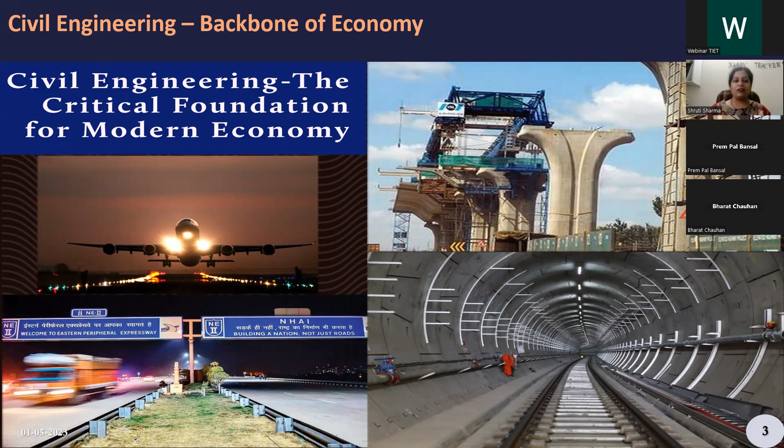Of an economy, as rightly said by Mr. Bharat Chauhan, it is the critical foundation for a modern economy. You can see the pictures in the slide here, the expressways, the NHAI, the tunnels, and the flyovers. They are the foundation for today's economy.

I must say, civil engineers are never out of demand. This profession, these civil engineers, they're always in demand. Why do I say that? You know, the global infrastructure, the huge population and the geographical areas still need to be covered with infrastructure, including India. We are way short of the need of a global infrastructure. We are still falling short of it.

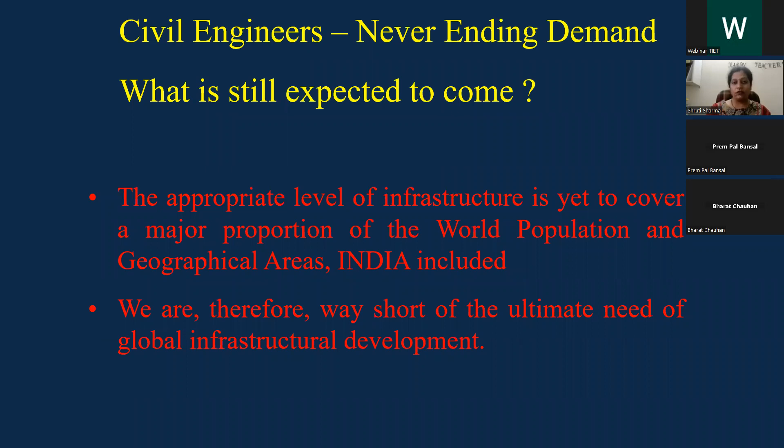I'll show you the slides. What's the role of a civil engineer? Why do we need it? When I say a developing country like India, the entire focus of a developing nation is on infrastructure development. Now the focus has shifted towards developing smarter cities, implementation of green environment, using or replacing non-renewable energy sources with renewable energy sources, and making our country energy efficient.

So there is never a scenario where a civil engineer will go out of scope, as the role of civil engineers in a developing nation will always be there. There will in fact be more demand in a developing country rather than in a developed nation.

Now we are seeing the growth of the population, urbanization is skyrocketing. So there is always going to be a shortage of projects or infrastructure needs. We need new roads, we need to renew old ones, we need more railway projects like metros, we need more airports. For that we need structural engineers, a specific side of a civil engineer, geotechnical engineers meaning soil engineers, or highway engineers. We need environmental engineers, again civil engineers with specific studies on environmental assessment or energy efficiency.

Another branch can be water resource management. We know that we need water lines, implementation of water management schemes, water management plants in the city. So again, the role of a civil engineer.

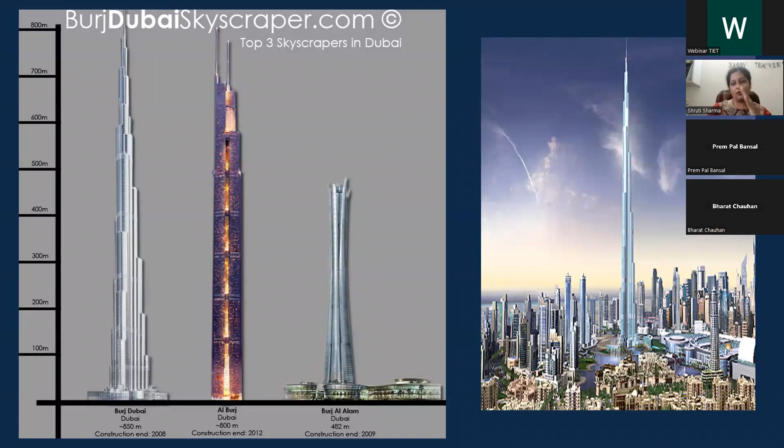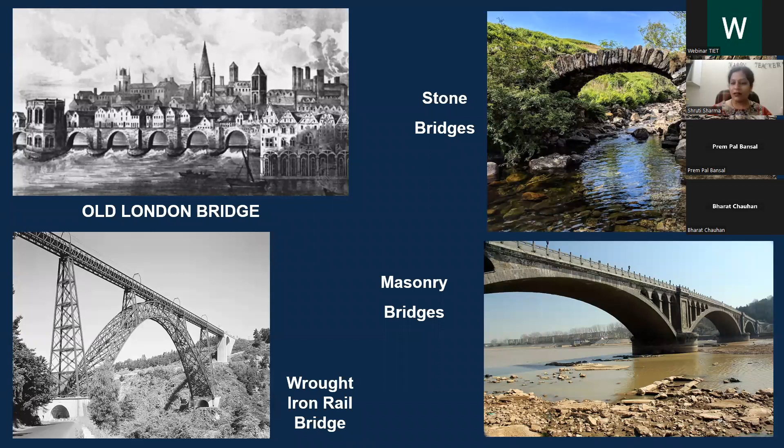Infrastructure building has come a long way. We started from the same old London Bridge, the London Bridge is falling down rhyme which we have heard in nursery rhymes. It has been there for centuries, it has developed over a period. We had stone bridges, wrought iron bridges, masonry bridges, and now what we have are the structures you see on this slide, the best structures in the world in a way. Just see the beauty, the aesthetics, and the technical development in these structures.

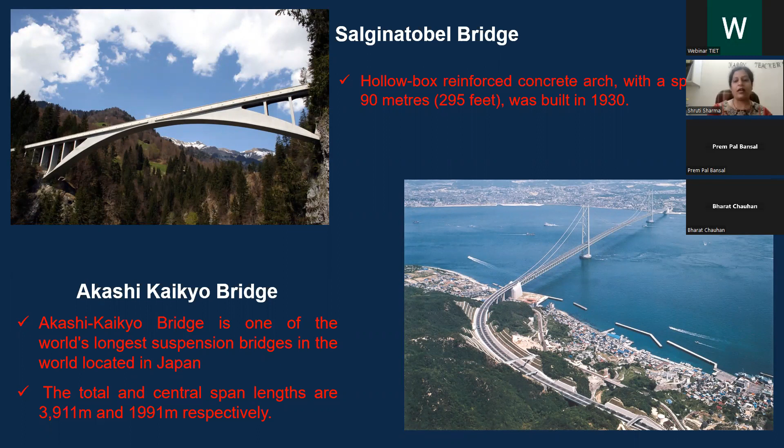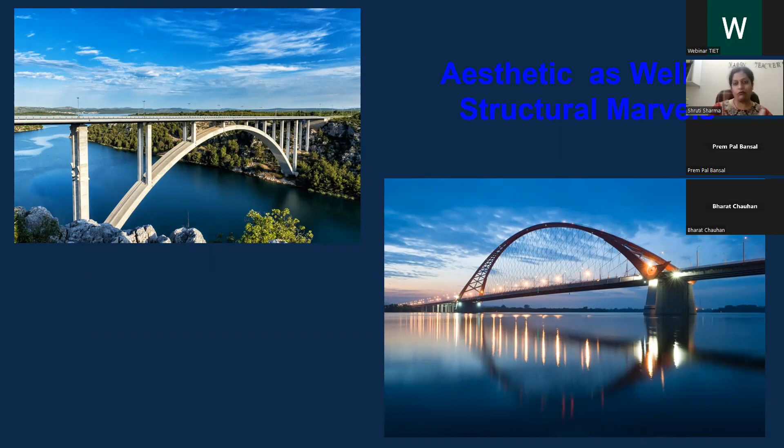The Akashi Kaikyo Bridge is one of the longest suspension bridges in the world, located in Japan. All of these are engineering marvels designed by civil engineers. You can never deny the role of a civil engineer. Look at the aesthetics and the structural marvels you are seeing now. They are buildings which have come into form and shape, and they are the pillars of the economy of various countries, including ours, which I'll show you.

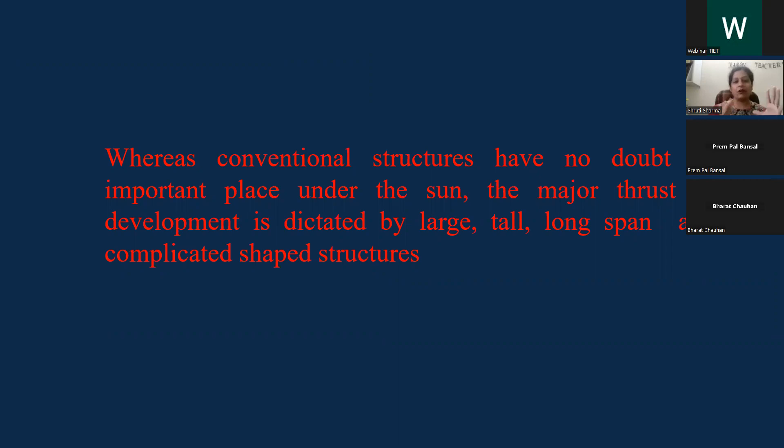Yes, the conventional structures, the houses we see around, are conventional structures. They are important, affordable housing is important, but when I say development, when I say infrastructural development and the role of a civil engineer, it is dictated by these tall, long skyscrapers, long span structures, and complicated shapes. Any shape you think of, now they are all coming up in this way.

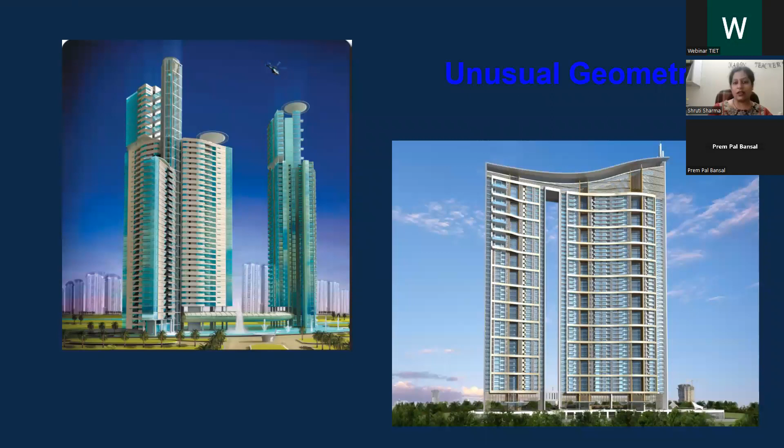We have seen so many of these skyscrapers in Noida, Gurgaon - let's not even talk of outside countries. They're all complicated shapes, and it's not so easy. It is the role of a civil engineer. You know, civil engineering is a royal branch in a way - you create something, you get that feeling that I'm a part of this creation. So it's not easy, it's tedious. These complicated shapes and tedious designs are all the role of a civil engineer, and look at the aesthetics they add to the country, and the economy they establish.

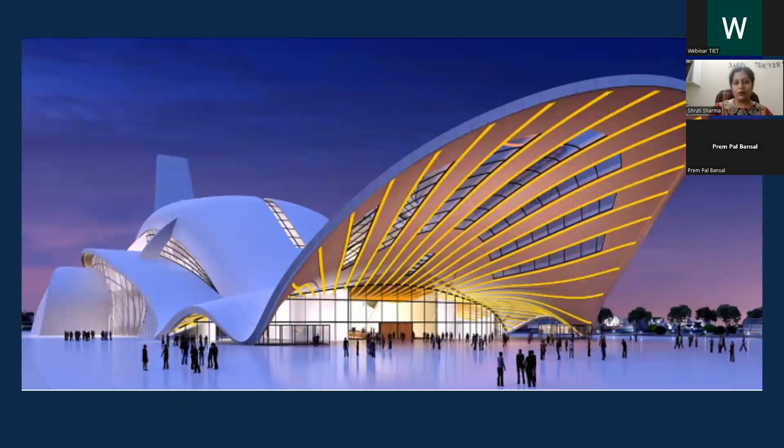These beautiful structures - now see, this is a South Indian pandal, just a political rally pandal. But imagine this whole large span structure being supported by these minute tubular members. They are the trusses, all designed by civil engineers.

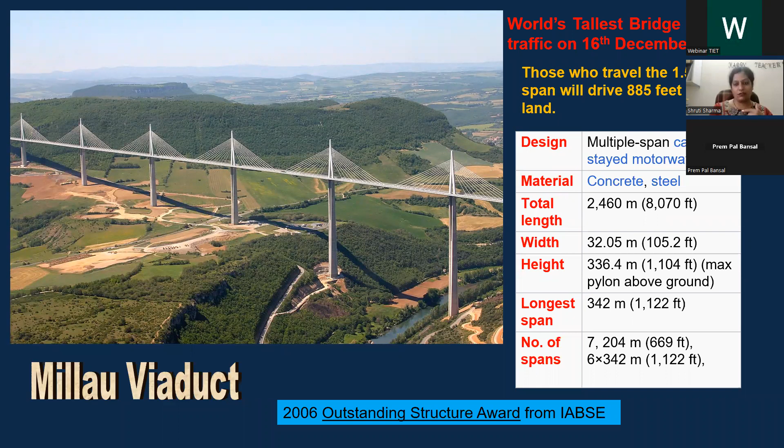Civil engineering is the backbone - we must have heard of the Millau Viaduct. It's a 7-span structure, a motorway bridge, a cable stayed bridge. When you travel on this span of 1.5 miles, you're actually traveling 885 feet above the ground. It's an engineering marvel. It has been awarded the best or outstanding structure award by the International Association for Bridge and Structure. So these are some things which are real and created by civil engineers.

India - it's not that we are showing these beautiful pictures and they're not a part of it. They are very much. Let us see what India is making. India is making world-class infrastructure. To list a few, it's a very menial list I've come up with.

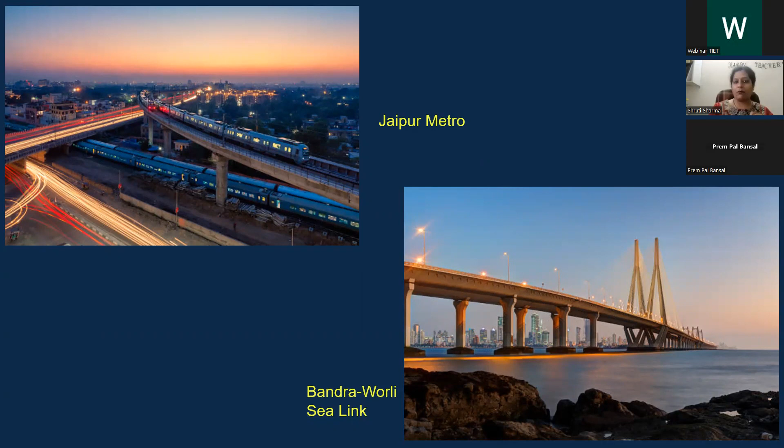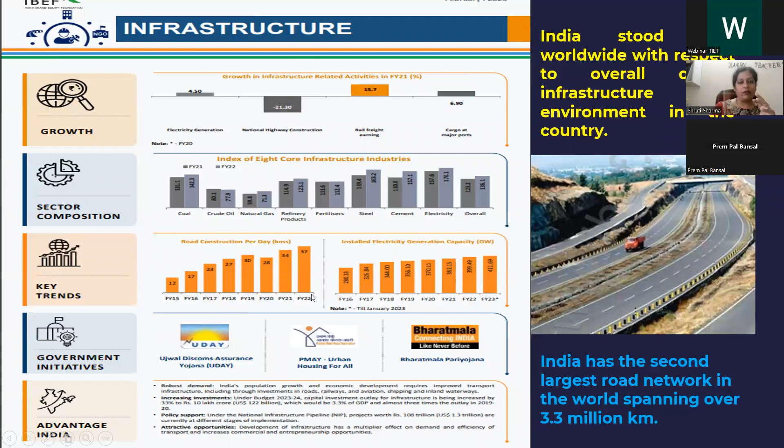The index for the 8 core infrastructure industries, out of the steel and cement, they are just expanding. The key trend - if you see the road construction per day in terms of kilometers, in every financial year right from 2015 to 22, it is skyrocketing. So this is the vision of the government, and we have to play a key role in it.

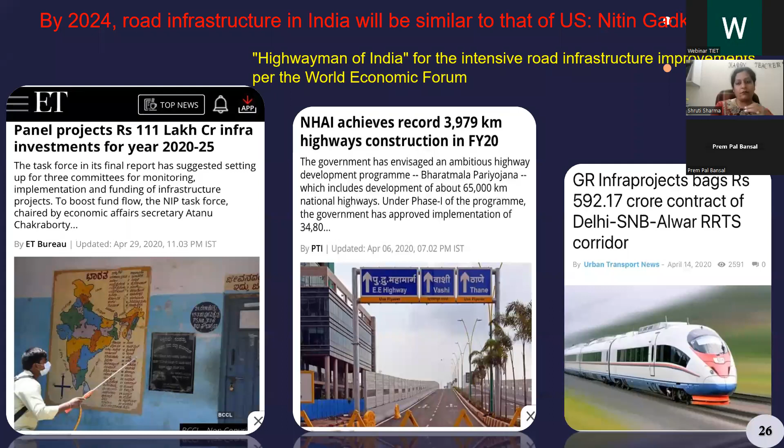...by the World Economic Forum. Why? He has been instrumental in shaping the kind of infrastructure development which has taken place in this country in the last 10 years. He says that the road infrastructure by 2024-25 will be similar to that in the US. And the government, as you see in the slide, is pumping in huge amounts of funds, and projects are being given or started or initiated or going on.

Just to add, the Thapar Institute has been appointed by the National Highway Authority of India in some mega infrastructure projects in one form or the other, like 4-laning of the roads in Himachal Pradesh. This is NH21. They have a team in Thapar Institute. I'll be outlining the team leaders here. They are safety consultants for the 4-laning of the Jammu Udhampur section, NH-1A.

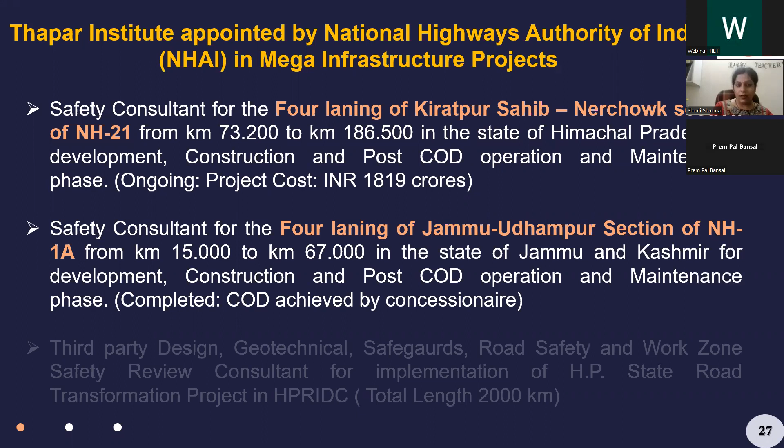Many, so many of them. They are also leading consultants in many major infrastructure projects in India, mainly construction of bridges, 4-laning projects, safety audits, and other things related to highways.

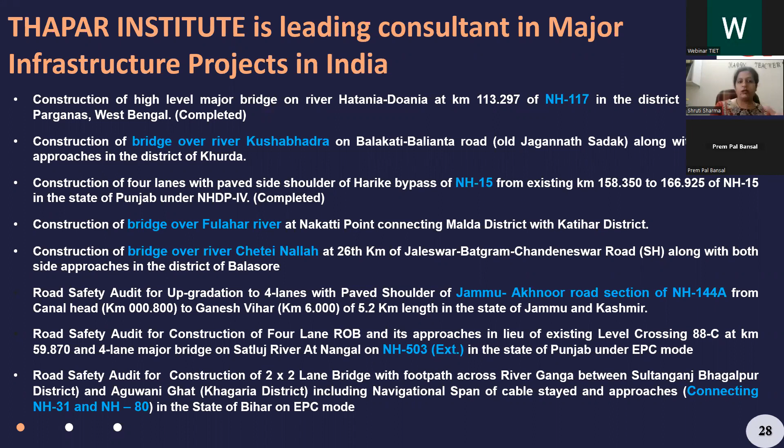So this is our team. The project team is headed by Dr. Naveen Kwatra. He's a professor in the department, and Dr. Prem Pal Bansal, who is the head of the department, and a road safety auditor, co-assisted by Dr. Tanu Chopra, whose specialization is transportation engineering, and Mr. Rajesh Pathak, who has specialization in geotechnical engineering.

So this is what I said: the role of everybody, structural engineers, transportation engineers. This faculty team, this project team at Thapar Institute, is supporting that dream.

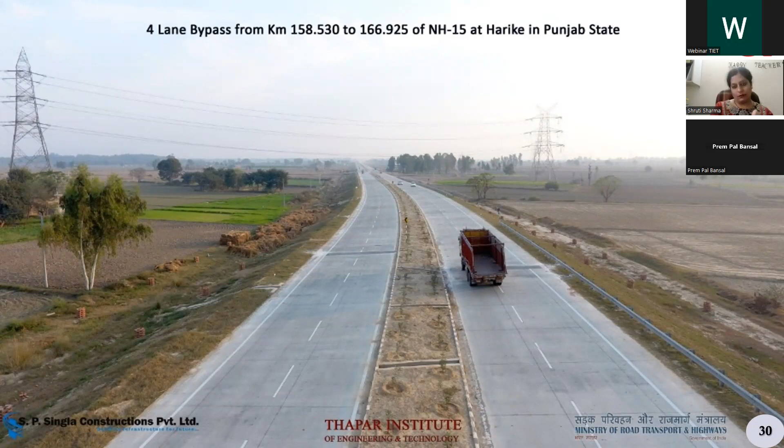Some of the clips from projects the department has worked on, like the 4-laning of Harike in Punjab state, then construction, just a small 2 or 3 slides. So it's following the vision here. It's not only about the rail roads and highways.

It's also about the government's dedication towards developing or revolutionizing the Indian railways. So there comes again the role of civil engineering, east-west corridors, called the dedicated freight corridors. So the government is pumping in more investment. We need good civil engineers. The government needs us, the country needs us.

Similarly, airports. India has become the 3rd largest aviation market, and it will become even larger by 2025. According to the GDP, to achieve a GDP of 4 or 5 trillion by 2025, India needs to spend about 1.4 trillion on infrastructure, and one of the major sectors is airports.

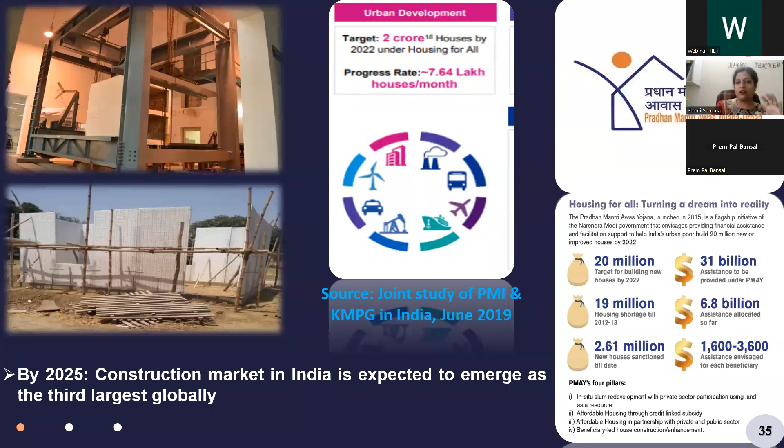Likewise, Pradhan Mantri Awas Yojana, housing for all, is something big. The dreams of the common man have now been turned into reality. By 2025, the construction market in India is expected to emerge as the 3rd largest. This is one aspect.

Then smart cities. It is the engine of the Indian economy. The government is dedicated towards developing 100 smart cities. This is what it will look like, the futuristic smart city concept. This is the technology, just one small glimpse of how our cities are going to look. And we definitely have a role to play. Let me tell you how.

This BE Civil Engineering scheme at Thapar University, Thapar Institute, in alignment with the vision of the government of India towards sustainable development, smart cities, and infrastructure development, gives you an engineering degree with focus areas. You can choose a specialization in smart cities, infrastructure development, structural engineering, or sustainability. So this is how we align.

So we have changed our curriculum, our pedagogy, our scheme, as well as the teaching methods, as laid down by Dr. Batish. We have modified all of that, entirely in line with what...

We are really short. The market predicts a supply gap of 44 million civil engineering professionals in India. This was 2020, when there was no COVID. Now that gap has become all the more wide. India will need 50,000... there is a need.

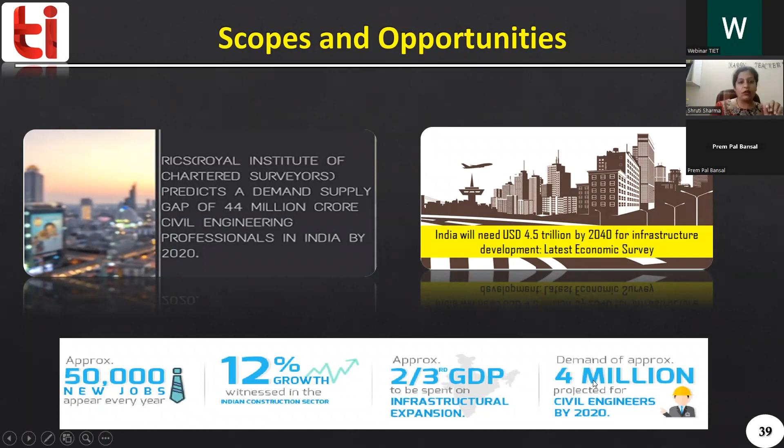Approximately 2/3 of the GDP is being spent on infrastructure development. We definitely need 4 million projected engineers in civil engineering. This is not 2020, this is now 2025, whatever I'm saying.

So the Department of Civil Engineering at Thapar Institute, if I take you on a tour of this, has aligned itself according to the vision of the government. The vision is that we need to develop our human resources. Here, the human resource development is the engineers you are making. They should have excellence in technical education, research, and career opportunities.

If somebody asks me what will I do when I become a BE civil engineer, it's as simple as that. As I said, all the infrastructure which I've been seeing in the previous slides is all made by engineers. It's the culmination, the joint effort of an architect, an engineer, and a skilled worker or laborer who make these structures.

So you can start a job as a fresher in the industry, in the real estate sector. You can work in PSUs, you can have government engineering jobs. There is another area or regime - if you have an acumen for research, you can join as a scientist. You can start your own entrepreneurial venture in India.

And there are some students who may have an inclination for higher studies. You can do a masters in civil engineering in European countries, US, Canada. You can have higher education in India itself. The new thing now is MBA, in specific regimes like infrastructure development, management, construction management, project management, real estate management.

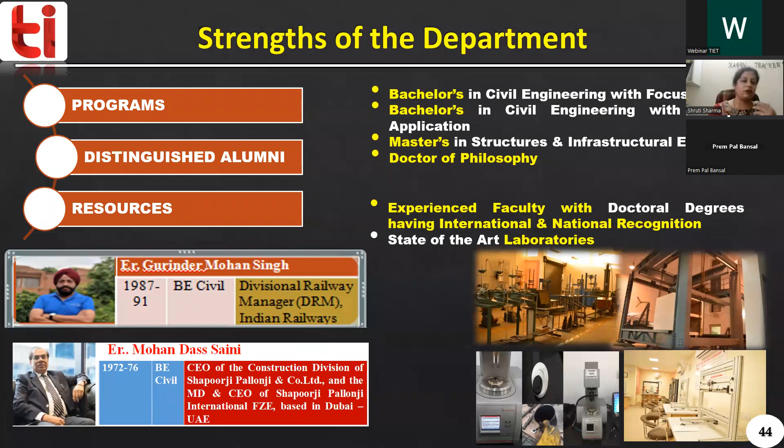Strengths - the third, and most important, are the resources of the department. It's not only about the infrastructure, the state-of-art laboratories. It's about the faculty here, which we are proud of - we have such a strong, experienced faculty having their degrees from various national and internationally recognized universities. We are really proud of it.

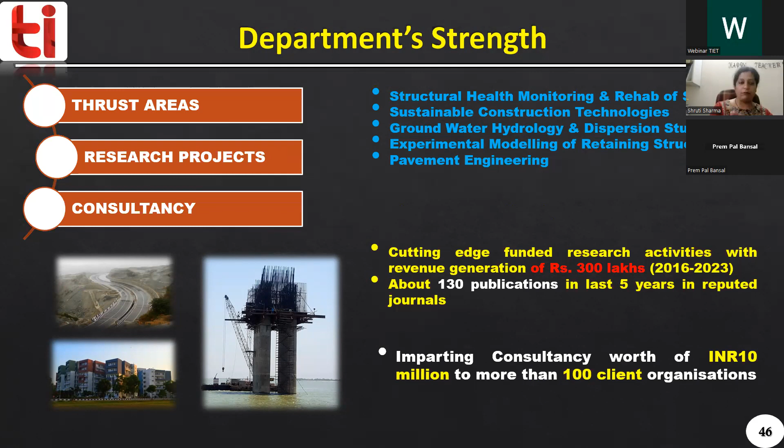And the faculty here is not only involved in teaching, they are into research, contributing to research which can lead to some other innovative technologies being developed. They are involved in research activities and have been able to generate revenue of about 300 lakhs in the past 6-7 years, with more than 130 publications - this is only Scopus index publications. We also have a very strong hold, as I showed in a few slides, on how the faculty here is involved in consultancy work and working in tandem with government projects.

Highlights - so the highlights of the BE Civil Engineering program, as I said, will have one being the BE Civil Engineering degree with specializations, all these specific focused areas. Then BE Civil Engineering with computer applications, which I just outlined.

In addition, I wanted to add that the students will be taught civil engineering courses with focus towards software - STAAD, AutoCAD, many more, Revit, then GIS-based systems, all the software which we have. They will also be taught some 5 or 6 courses which are specifically computer oriented, like networks and so on.

So there's another thing - in every engineering stream in this university, the student can enter into any stream, including civil engineering, and get a civil engineering degree at the end of 4 years, BE Civil Engineering. In addition, a minor in computers, for which he has to do 5 to 6 courses along with his regular scheme during this 4-year duration, totally focused on computer applications or computer subjects.

So this is an overview of the programs which we are offering here. The best highlight, as said by Dr. Batish, is that we don't believe in rote learning or the traditional method of teaching. Our students are exposed to experiential learning projects, meaning hands-on experience by their own hands.

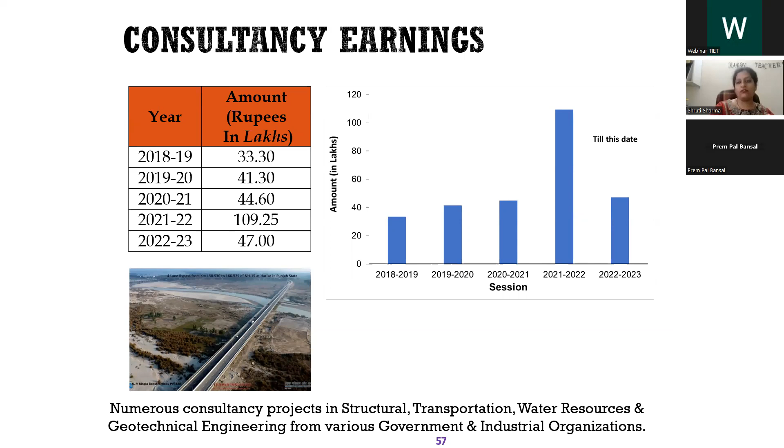Till only March 2023, we have these figures. I think this pillar will still go up further. And since our faculty is involved in structural, transportation, water resources, and many other consultancy projects, this is the figure of the consultancy earnings which our department has got.

The recognitions: Dr. Prem Pal Bansal, who is heading the department, received the ICI award for the best research paper on construction techniques. Dr. Shweta Goyal has been recognized as an innovative researcher in construction materials and techniques.

Myself, I was awarded the best cited paper award in 2019. And the list is, we have just put the latest ones and the list is very long. Dr. Richa Baba was a STEM fellow in 2018. Dr. Manpreet received the Student Paper Merit Award at the ASC conference in Minnesota. This list is very long, but we have capped it up to 2017 or 18.

The best part, which we are very proud of, is the ELA activities. Our students do these learning activities by hand, on their own. This one is the construction of a house using EPS panels.

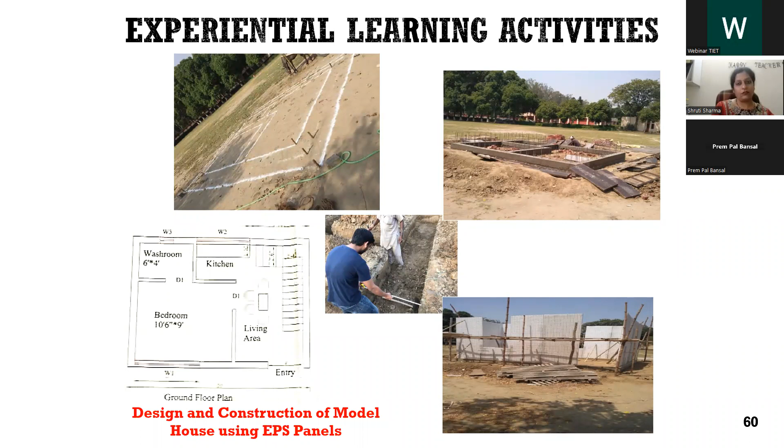EPS are the polystyrene panels. We should see here that the students have built this house plan with EPS panels. This is part of the affordable housing concept of Mr. Narendra Modi. So this is one of many activities as outlined.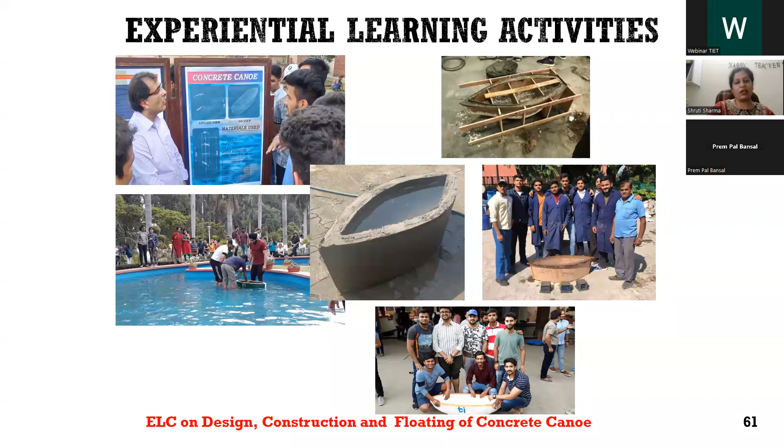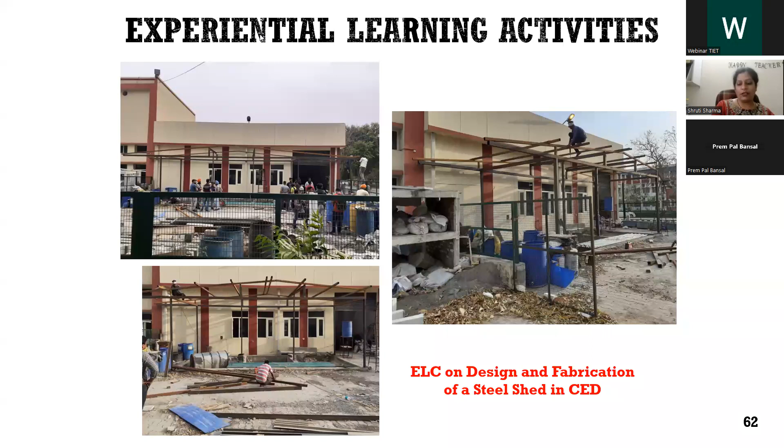The students constructed, not only did they design, they fabricated this shed outside the civil engineering department. This was a third year student group ELC activity, on design and fabrication of the ELC steel shed in the department itself. It's very much in working condition.

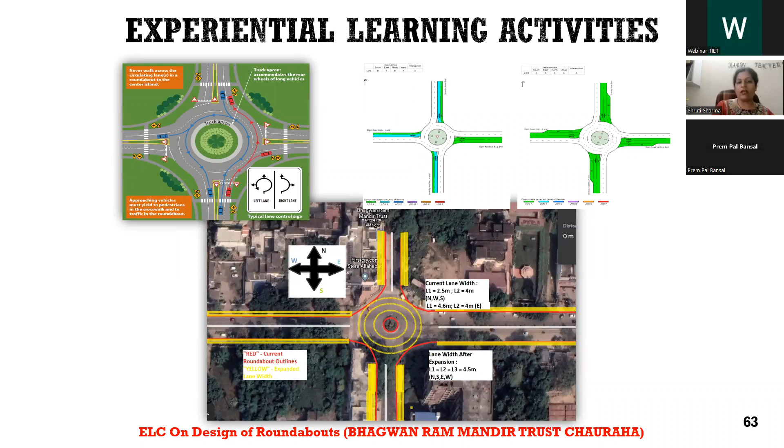The latest ELC activity involved students in designing roundabouts, which is very important for the traffic scenario of our country today.

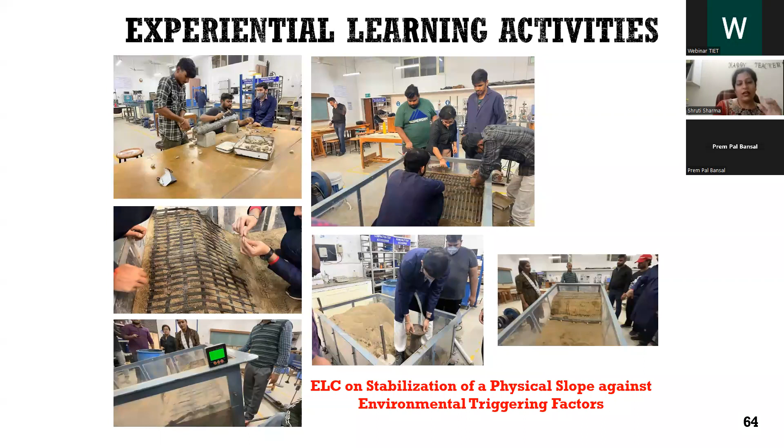Then similarly, stabilization. We have hilly areas where the soil is vulnerable to triggers like earthquake and landslide. How to stabilize the soil. The students were given this activity to design or stabilize the physical slope against various environmental hazards or disasters. They had to give us suggestions and design that. So this was one of them.

Today's important thing, damage analysis and health monitoring. The students were taught how the building can be assessed, and were involved in an activity wherein they had to make a structure and do the analysis by non-destructive means, to check the health of that structure by UPV, ultrasonic pulse velocity, or many other methods. So this is damage analysis or health monitoring of concrete structures.

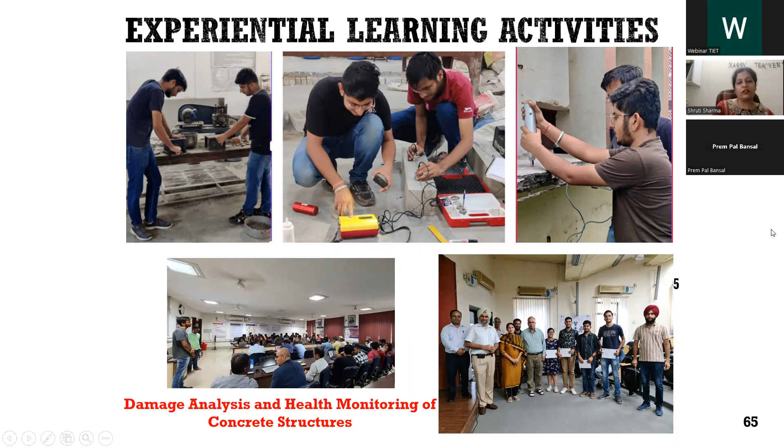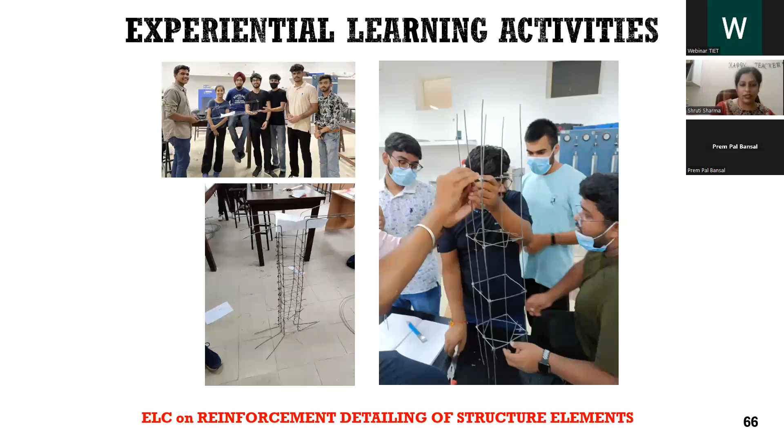Last but not the least, the students were taught how to design the very common language Saria, how to put that Saria or detail that Saria in a building. This was one project which was given to the students.

So this is how the students enjoy. It's not the common teaching pedagogy we have been following, book reading, learning, giving exams. You get the feel of your civil engineering field when you actually work.

So this is the kind of exposure which we are proud that our students will get if they work here. It's not that civil engineering is all in the books, it's all in the field. And this is what various companies, you must have heard many of them, EIL, Ramboll, Systra, Rites, Tata Projects, they visit our institute, L&T, very well known, everybody knows it. They come or visit our institute for placements for our engineers.

And the students, during their project semester or training, visit various organizations, and most of them end up getting a job there too, because they do 6 months training there. They get to know the company, and most of them are offered offer letters. Similarly, NHAI, DMRC, Systra, L&T, to name a few, Rites. These are the companies where our students go.

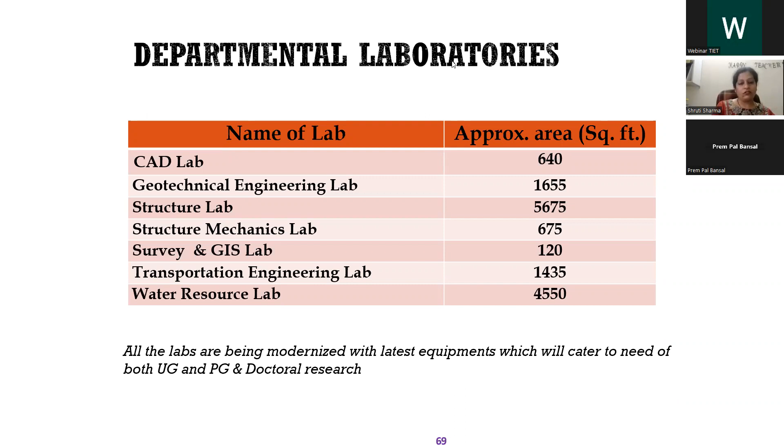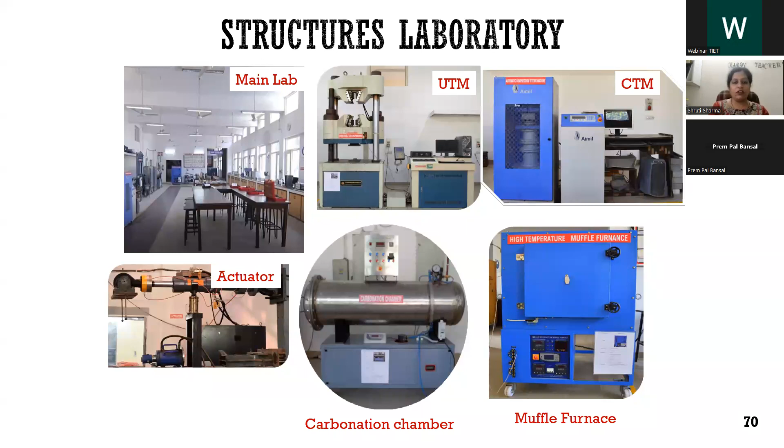So I'll just move to glimpses of the various labs. This is the structural engineering lab where we have the best setups, the UTMs, universal testing machines, compression testing machines, chambers, actuators, furnaces.

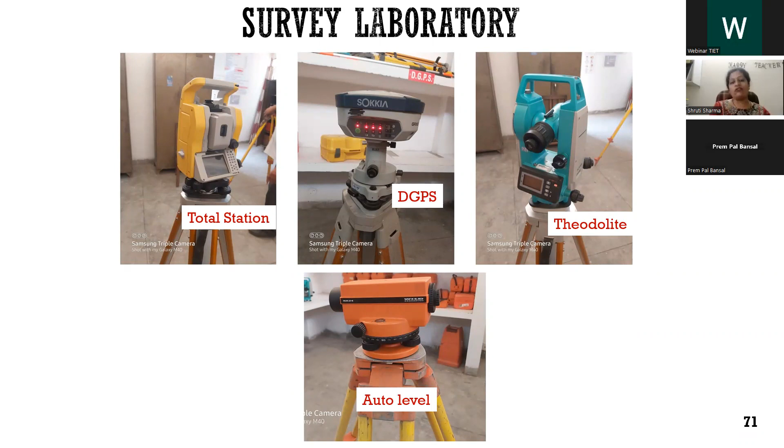The survey lab, we are very proud that we have the best survey equipment in North India: total stations, differential global positioning systems, theodolites, auto levels. As I said, no project can be started without doing a survey of the area. So these are the best of the best equipment which we have.

The CAD laboratory, where students now have some courses that require them to do designing on structural softwares. So this is all done here.

This is one of our best labs, the structural mechanics lab, where if you look closely, you can focus on the models of the structures which I just showed, like the truss.

This one is the truss and frame structures lab. These are the models here. Students actually work on how these structural frameworks carry loads in this lab.

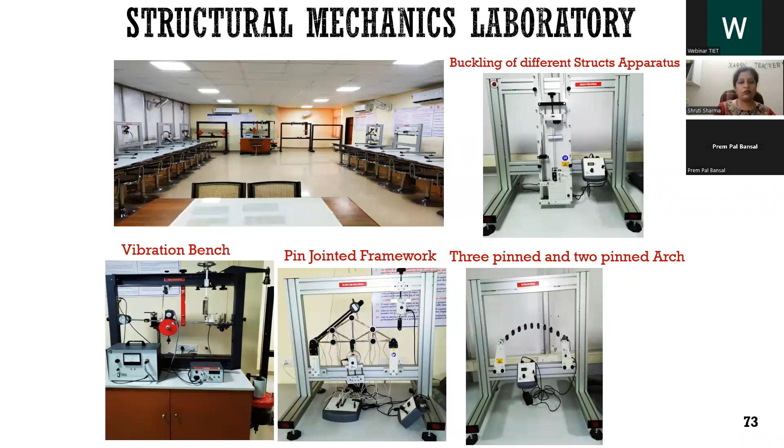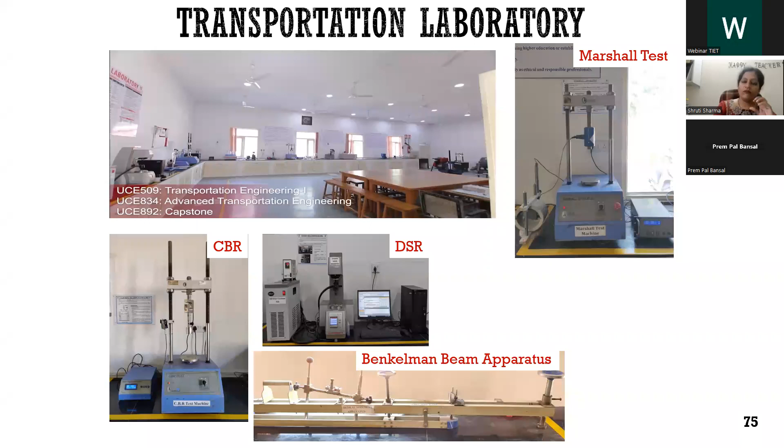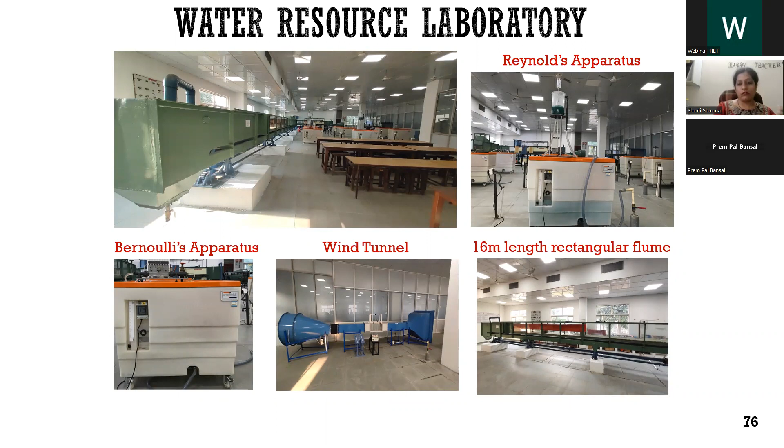We have a huge amount of our consultancy coming in highway as well as structures engineering, and also in water resources. This is the 16-meter long flume and various apparatus we have in the hydrology lab.

We are very proud of our awards and recognition by faculty. Very, very important is the achievement of the students.

We are really proud of our students like Gursimar Singh, who was selected for UPSC. We have a team of civil engineers in final year who bagged an award for the best innovative steel design, with a cash prize, won by Abhishek Bhagla, batch of 2015. He had an all India rank of 4 in the engineering services examination, and so many more. There is a long list.

One group of students works in private or government organizations. There are many students who go for higher studies, and we are very proud of our students.

Mr. Aditya Singh, who is doing his MS at the University of Nevada in the United States, was also selected in Texas A&M for the PG program in transportation engineering. Madhav Verma, 2020, is working in the Louisiana Transport Research Center as a research assistant, and he was also selected in the University of Waterloo.

Mr. Agesh, we are very proud of him, scored AIR of 4 in the engineering services exam 2018. And these 3 students, Yatin, Bhavya, and Mayank, scored AIR of 8, 20, and 24 in the 2020 ESE examination. Engineering services examination is conducted by UPSC specifically for civil, mechanical, and electrical engineers. It's a government job totally aligned towards engineering development and infrastructure.

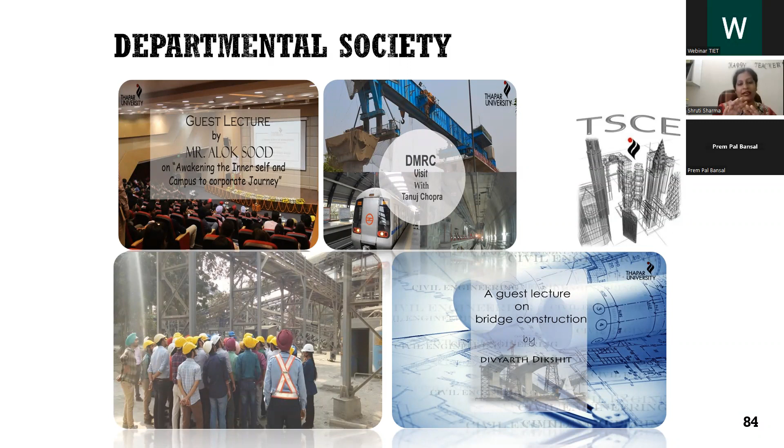Students here also have a society for civil engineers, the Thapar Society of Civil Engineers. Throughout their 4 years, this society conducts workshops, training visits, training programs, and guest lectures. They do site visits to DMRC, as you see in the slide, so that they get aligned with and get a feel of the civil engineering streams.

These are some snapshots of how the TSCE motivates the students and aligns them with the curricula and what the field entails. These are glimpses of visits to DMRC or a highway, a lecture by the Aditya Birla group, or a workshop on the GATE examination.

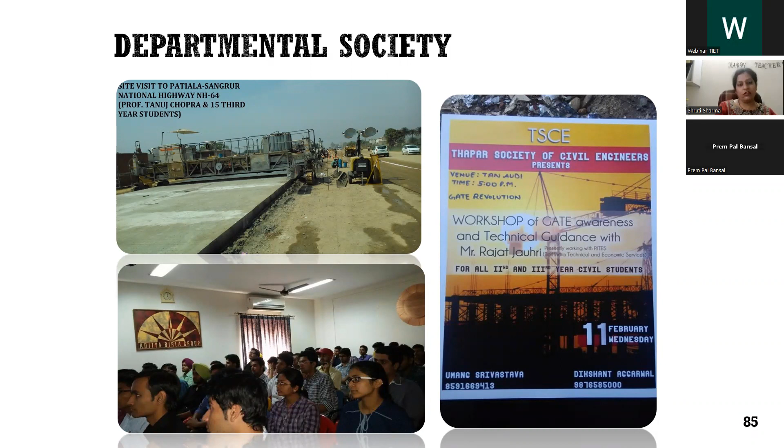What I try to show you is that civil engineers have a big role in today's economy, and the need for a civil engineer is skyrocketing. The country needs us, and we are the creators. We do creations which we are really proud of. If I design something, I'm always proud of it in my mind, thinking 'this was designed by me.'

Like there's a shopping complex in Thapar Institute itself, I was involved in the design of that. Dr. Prem Pal Bansal has handled so many projects in Thapar Institute as well. So whenever you pass by those structures, you get the feel that you are the creators, that you are somehow involved in that.

Students, all the aspirants here, your role in the future of this country is much more important than what you realize. I think Thapar Institute gives you the right platform, the department gives you the right platform, and the institute gives the best facilities, best faculty, and best exposure in terms of entering this BE Civil Engineering program at TIET.